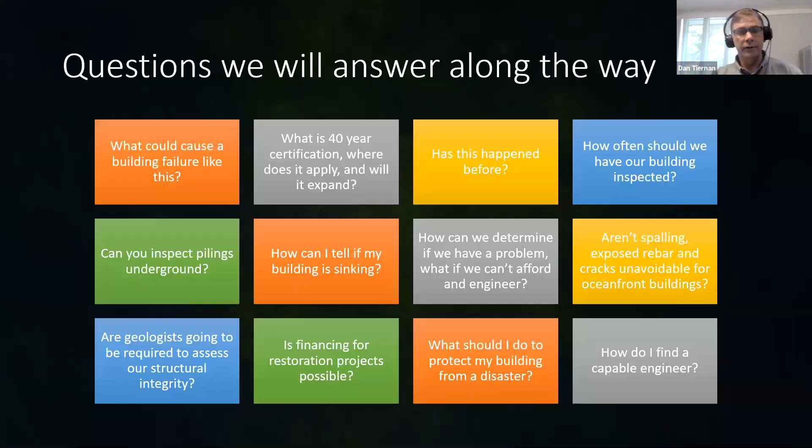We had several hundred people signed up for this course, and we had a lot of great questions that people asked, and we're going to answer, and these are just a sampling of some of the questions that we're going to try to address as we go through this. So just be patient. You saw what the agenda is. We'll get to all these different topics, and we'll try to address all of these questions and a lot more as we move through it. But I also want to make a quick disclaimer that there'll be certain things that we won't be able to answer. So our goal today is general education.

Like I mentioned, we have people from over 500 condos that registered for this course. So we can't address questions that are specific to your building or your area, although we will talk about certain areas based on the content of what we're reviewing. So this will also be very fact-based. We won't be predicting if or when something may or may not happen in the future. I'd love to be able to be good at that, but we're not even going to try.

And there are a lot of theories floating around about a lot of topics related to building safety. So we're not going to try to debunk any mysteries here. We're going to focus on just the facts, because I think there is so much that you can learn just in general about construction that maybe you didn't care about before, but maybe you want to learn a little bit more about now.

And although we have an attorney on the call today, Allie, thank you, Allie, we're not focusing on the legal implications or legal responsibility of what may or may not happen in an accident. So I know there were some questions about that, but we've got so much to cover already. We're going to try to avoid that. There's a lot of other webinars about that. So with that,

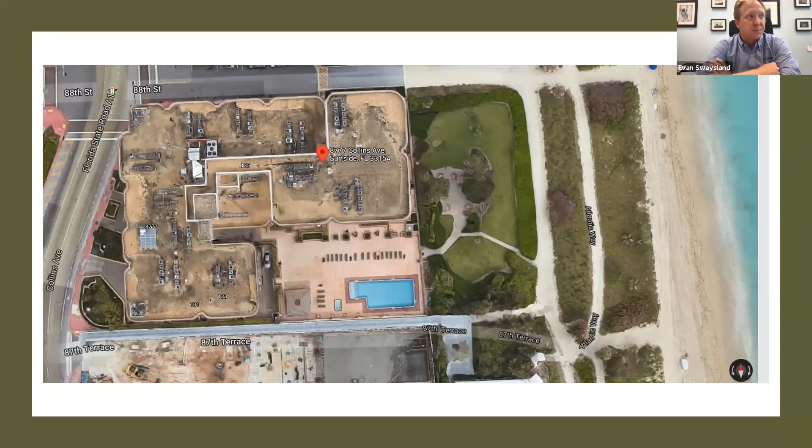Okay. Just one other picture I wanted to show here, from a top-down view. The most obvious thing I see right away is the proximity to the ocean, but anything else there, Evan, that is relevant? No, I mean, this is the north end of Miami Beach, and in that area of Florida, there's basically condominiums all up and down on that barrier island. So this is typical for what happened. Right. Okay.

Many of you may have seen this short video before, and some of you maybe have not seen it. It's very disturbing. And I just wanted to warn you that I was going to show this video clip from the surveillance camera from a neighboring property. And I'm doing this just so that I can have Evan comment on what he's seeing happening. And again, we're not going to make any conjectures or theories from this, but just observing what's happening and what he's seeing from a structural engineering standpoint. So I'm going to go ahead and start it now. Second.

So, it's hard to watch, and from the first-hand accounts, a portion of the garage collapsed approximately 10 minutes or so before, call it the north center section of the building. And in the aerial images you can see now, the portion of the pool deck, the pool deck slab collapsed into the garage. The portion that you can see on the ground more or less aligns with that center core that collapsed first. So now what caused the collapse, I don't know.

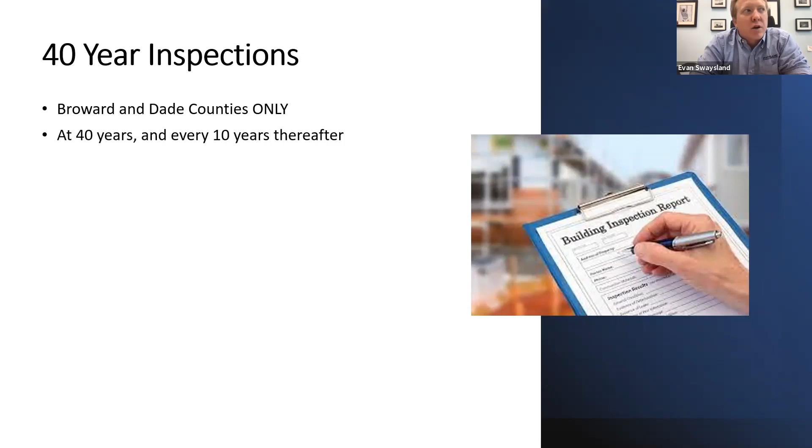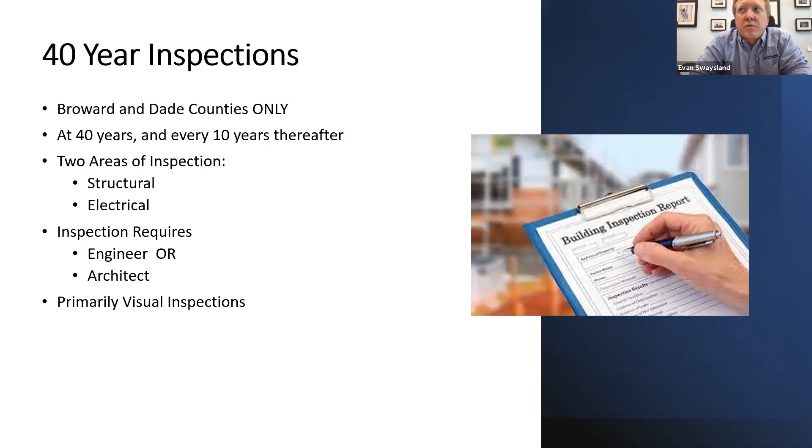So the 40-year inspection is a requirement in Dade and Broward County. When your building hits 40 years old, you're supposed to hire an engineer or architect to review the structural and electrical systems. And then every 10 years after that, you need to do another recertification. And I think this likely will become a thing in Palm Beach and maybe elsewhere. Realistically, what you're supposed to be looking for is life safety issues. That's really the basics of the 40 years.

And it started due to a balcony collapsing due to corroded rebar right at its cantilever moment. And that's kind of what stemmed this: hey, let's make sure these buildings are safe for continued occupancy. And its real intent was a cursory, visual inspection of the building. You're not diving into cores of slabs and X-ray and GPR to determine all these different conditions. It's a visual inspection and correcting life safety issues.

And incidentally enough, we had a pretty productive conversation with the City of Fort Lauderdale assistant building official, because we do those inspections and we've been doing a lot of work in Fort Lauderdale for a very long time, talking about the 40-year, talking about balcony restoration projects, and there's definitely going to be some changes to that certification program moving forward.

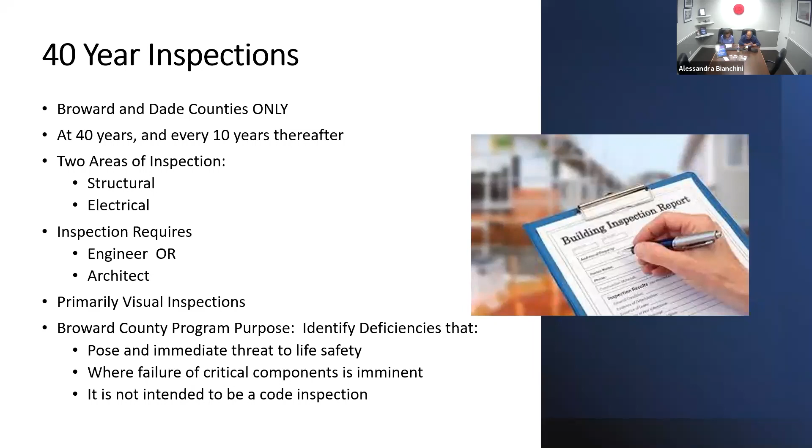Basically, Evan, I have the question: when you do a 40-year inspection, it'll involve railings, code, fire alarm, electrical, and concrete, visual concrete above ground. They don't get into anything underground or geotechnical, correct?

Correct. There's a standard form, and basically what you're looking at is the reinforced concrete structure, any structural steel elements. You're looking at walls, you're looking for settling or bulging of walls, which would indicate maybe you have a problem with the footing.

But no, there's never been inspections of deep foundations, and that's going to be something that is likely going to be new. And there's not a lot of companies that can do that non-destructive type of testing to make sure that your footings are working how they're supposed to work. So again, this is all new territory as of last Thursday.

I have some questions from some audience members. I think we can piggyback onto each other while we're on this 40-year inspection topic. Some people are interested in what is the normal useful life of a building and how often should you get inspections, and also can a visual inspection give a high degree of confidence to the safety? Can you kind of answer some of those? What's the normal useful life?

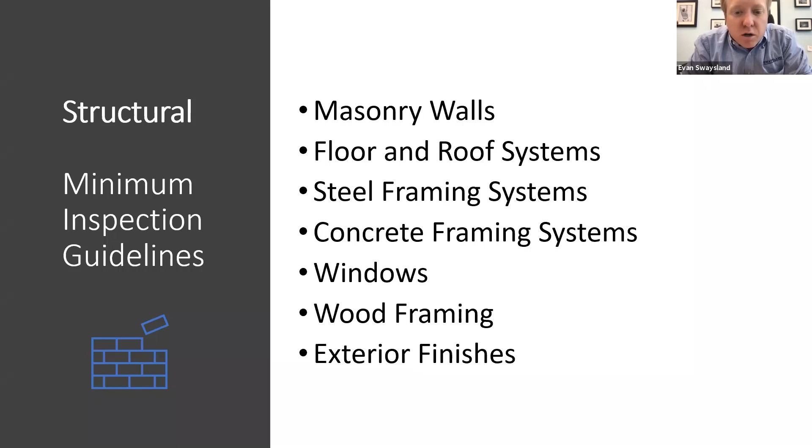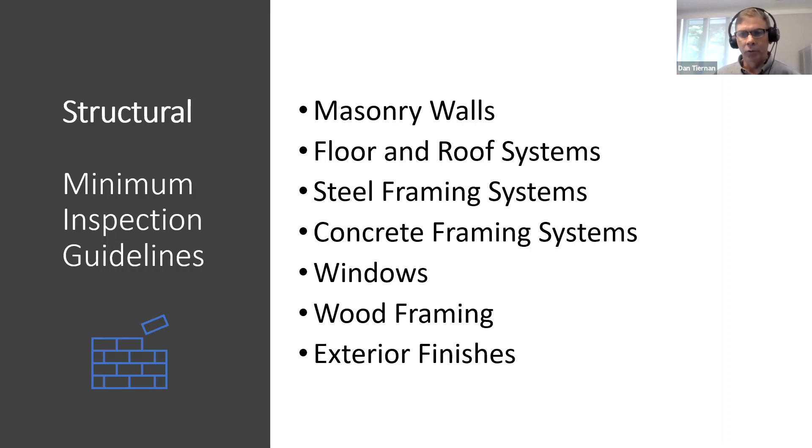And I think that's a great point. One of the key things we try to remind all of our clients that are high rises, really all the associations, is just the absolute importance of preventive maintenance. So often it's so easy to ignore when you have a new condo. It's been turned over from the developer, everything is working great, and it's hard sometimes to get people to focus on the importance of developing these maintenance contracts to make sure that everything stays in great shape and that we don't just let it go and count on warranties. Hopefully this will remind people of that.

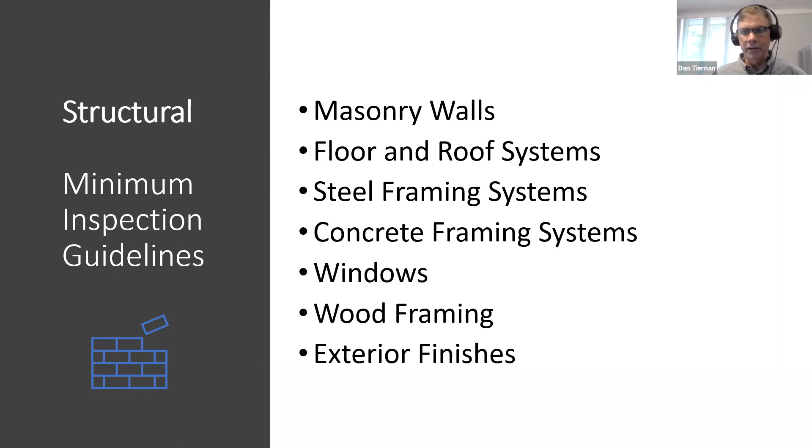All right. So then I put up a quick slide here, and you mentioned some of this from a 40-year inspection. These are kind of the minimum inspection guidelines. It gives you a sense of the kind of things they're looking at, and Evan already hit on these. And then from an electrical standpoint, there's also a fair number of things you're looking at here, but like he mentioned, it's not necessarily a code enforcement thing. This is more of a life safety situation, and they're looking at these from that standpoint.

So there's not elevator inspections related to this. There's not piping and paving and other things like that.

It's very much around the structural and electrical from a life safety perspective. So the next thing that we were going to talk about is honestly the rarity of anything even similar to this. There's been nothing that's ever happened like this that I'm aware of, or anyone I've talked to has been aware of, in Florida or even anywhere in the country.

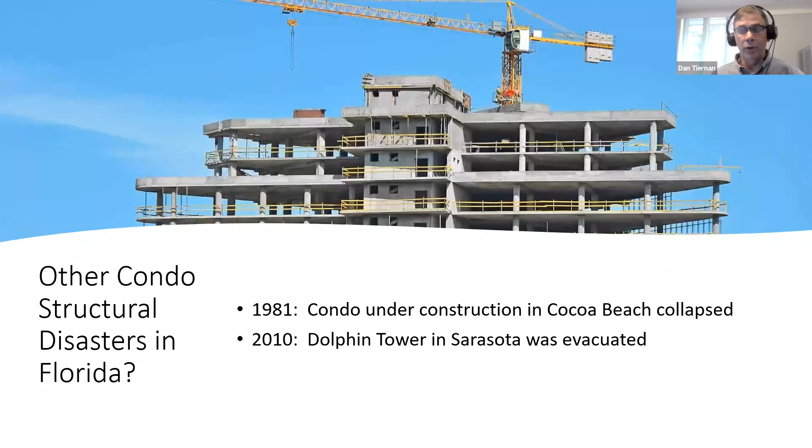And so we just did a little research on other condo structural disasters, and a couple that we're going to talk about here are this condo in Cocoa Beach that collapsed under construction in 1981, which is 40 years ago. And then this one building in Sarasota called Dolphin Tower that was evacuated almost 11 years ago to this day. So let's talk a little bit about each of those.

Evan, why don't you tell us what you know about Harbor Cay Condo in Cocoa? Yeah. This was the year I graduated high school, by the way. Yeah, and I wasn't even born yet.

But I actually have some cursory knowledge. We're not a large office. We're an office of 4 professional engineers, and 2 of them worked for a company that did some expert work at the time for this building. So basically, the reason for that collapse was a combination of design flaw by the engineers, and also construction flaw by the contractor.

There was a particular problem with where the rebar was set, the effective depth of the rebar in the slab, and there wasn't enough accounting for punching shear in the slab. So what ended up happening is you had basically a punching shear failure, which caused that pancaking effect. And there's also some discussion of compressive strength of the concrete not being per design, which all relates back to multiple errors resulting in this disaster.

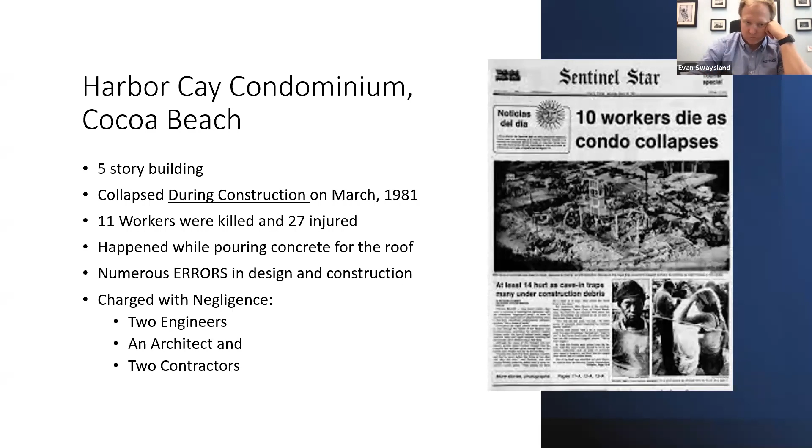Yeah. Thank you for that. And I think one interesting thing did come out of that. Tell us about what this threshold building inspection is. Yeah, so when you're performing work on certain size buildings, so it's a 3-story or higher building, and I think a building over 50 feet too, the building departments or Florida Building Code requires the owner to hire what's called a special/threshold inspector.

And that's a specific license for basically inspecting ongoing construction work, because the building departments won't perform the inspections. They just review your inspection reports. And the Florida Board of Professional Engineers just came out with another special inspector license called a special threshold limited license, which allows engineers to perform inspections on concrete restoration projects with minimal repair.

So those are the 2 licenses now that you basically need as a building. You guys that are likely on this webinar are all going to meet this requirement. So you need to make sure that whoever's inspecting your building has this license and is using the correct authorized representatives that the Florida Building Code allows you to use. Great, thank you for that.

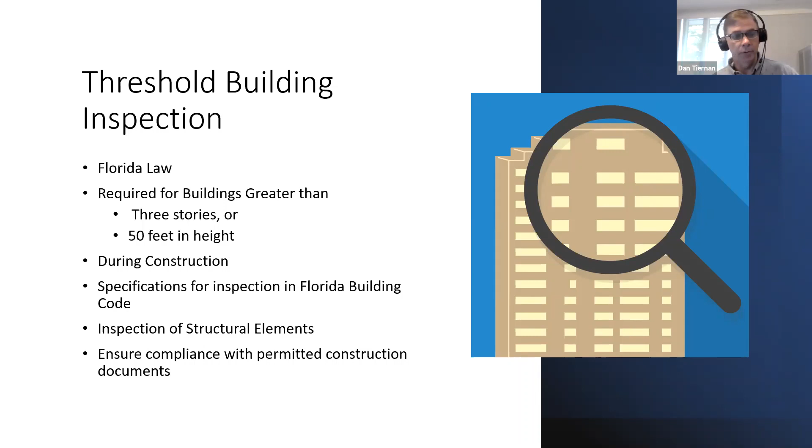So again, a collapse like this has never happened before in the history of Florida that we're aware of. Again, this was under construction, where it emerged very quickly while it was being constructed. It was still a horrible tragedy. A lot of people died, horrible situation. But again, we're not aware of anything even remotely similar to what we've seen happen here recently.

What about this Dolphin Tower in Sarasota? What do we know about that? What we know is that some residents on the 4th floor basically started noticing a very large crack opening up in their floor slab. And they actually had an engineer that had been doing work out there, Karins Engineering, who's still out of Sarasota. So, Evan, just to be clear, the 4th floor was actually the first residential floor, right? Right, 3 stories of garage. Yeah. Okay. And they started noticing a crack.

He ran over there, and within a few days, they basically shored up the entire structure and likely saved it. And I didn't see a significant amount of anything as to the cause, the why. But they did spend over $8 million in repairs over many years to repair the structure, and it is now inhabited again. But there was no injury or death there because they acted quickly when they saw a crack forming that was fairly wide, we're talking inches wide, not just a hairline crack.

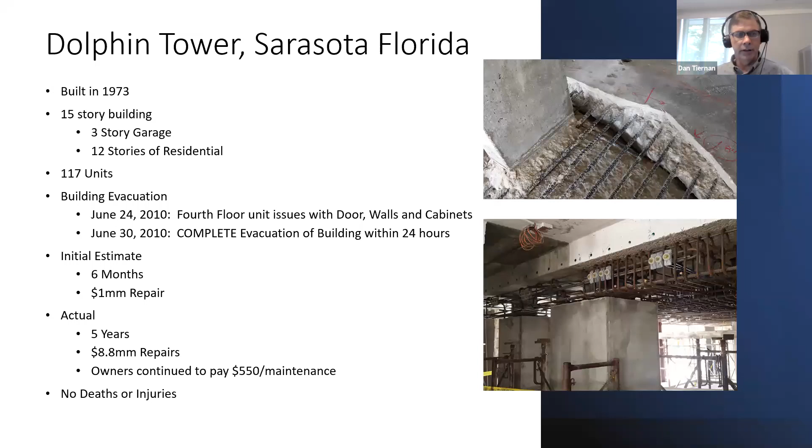Right. So again, there were some really obvious signs of something wrong that just couldn't be ignored. So I think the point of this was just to show that we're in absolutely uncharted territory here. This is nothing we really have a lot of case studies to look at. We can learn a little bit and understand a few things from some of these past problems. But again, it's an incredibly unprecedented event, and I think it's going to take a long time to really understand.

The next thing we want to go into is the buildings down here. The structures are primarily concrete and rebar. One of the key challenges we have in all of our condos is the deterioration of this concrete and the restoration. So we want to make sure people understand why this happens, how it happens, and what you have to do to deal with it. So do you want to explain this process of concrete corrosion?

Yeah, so your concrete slabs and columns have what's called reinforcing bar located inside them, and that's typical construction. I'll get into post-tension a little further, but when the concrete encases that reinforcing bar, it has a high pH level, and over time that pH level starts to drop due to chloride ingress into the slab. Once the pH reaches a certain point, your chloride content is high enough that the embedded reinforcing bar will start to corrode. So it's rust forming on the reinforcing bar.

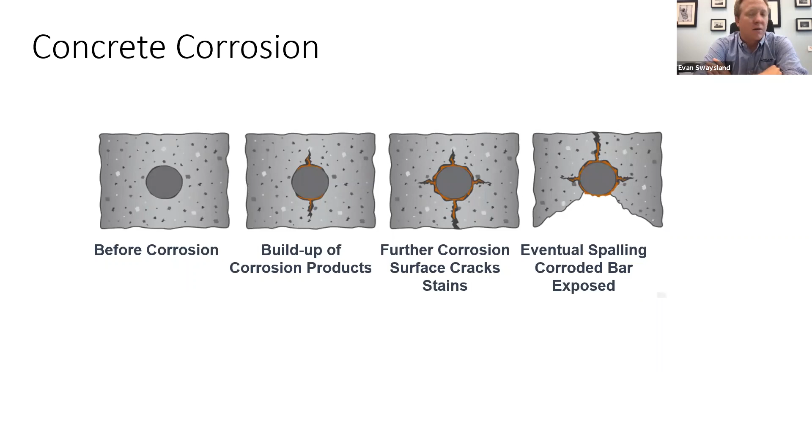Okay, great. And then what should people be looking for if they're concerned about their concrete deterioration? Yeah, so from a unit owner perspective, it's cracking in your edges, your overheads, cracks in your tile. You'll sometimes see rust staining, particularly around railing post pockets. Any type of spalling is of concern. If you have water intrusion coming through a slab or into your building, this could all be something that you guys need to pay attention to.

Yeah, so you ran by a term real quickly there, railing post pocket, right? So just explain what that is. Yeah, that might be something people... Your aluminum handrail, typically the slab will have a core, so an open hole for the aluminum railing to sit in, and that gets filled with the non-shrink, non-metallic grout.

What can sometimes happen is that the aluminum post is too close to a rebar and you get a dissimilar metal interaction there, and you can actually accelerate some of the corrosion of the steel in your railing post. So usually what you'll see is rust bleeding coming out right around the post of the railing. So that's an important thing to pay attention to.

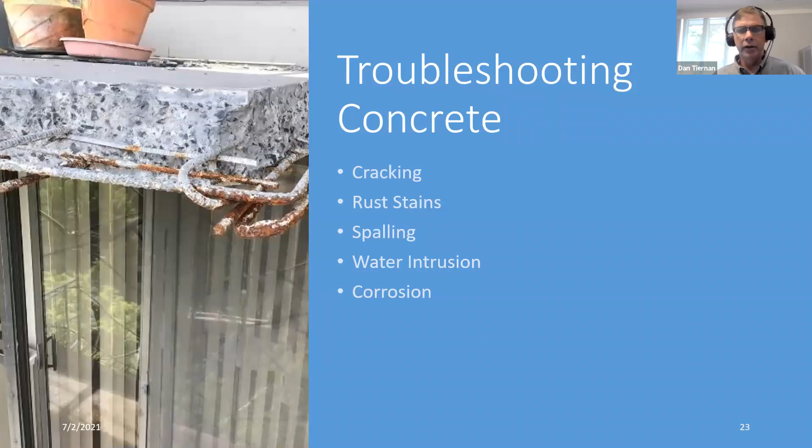Yeah. So all of this really is about managing risks, things that could go wrong. So Evan, you want to just describe these three things here? Yeah. So this would be our typical failures of structures: a spall on a slab edge breaks loose and falls to the ground and hopefully never hits anybody. That would be the typical worst case scenario. And occasionally you might have a significant amount of corroded bar at the cantilever moment.

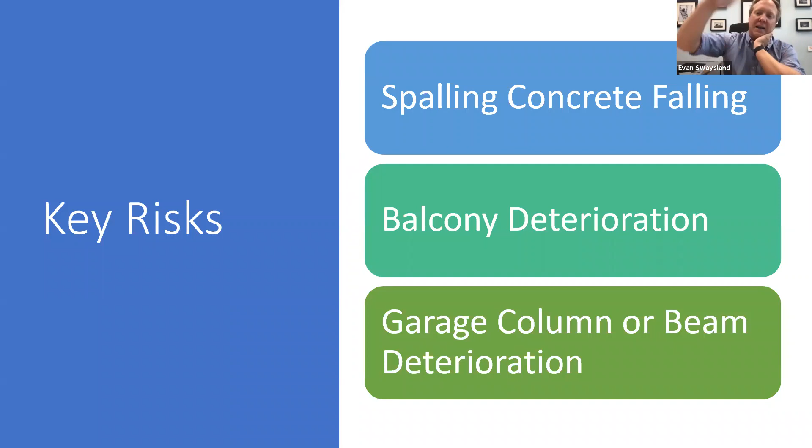You might have excess deflection or maybe some separation of a slab, but you never had the pancaking. And one thing that is very serious, particularly if your garage is under your building, is paying attention to your building columns, your building beams, and your garage columns to make sure that those don't have any deterioration, and if they do, to repair them properly, to make sure that you're maintaining load path for garages, columns, and beams. There needs to be thought about how you're making the repairs.

It's not just chipping out and putting stuff back, when that process might cause a more significant problem elsewhere. If you remove the load from the column and put it elsewhere, you could have something bad happen in a different portion of the building. So it's a lot to consider, and it's not for a lay person to consider. It's for you guys to hire an engineer to come out and do an analysis and make recommendations, and then follow through with the recommendations.

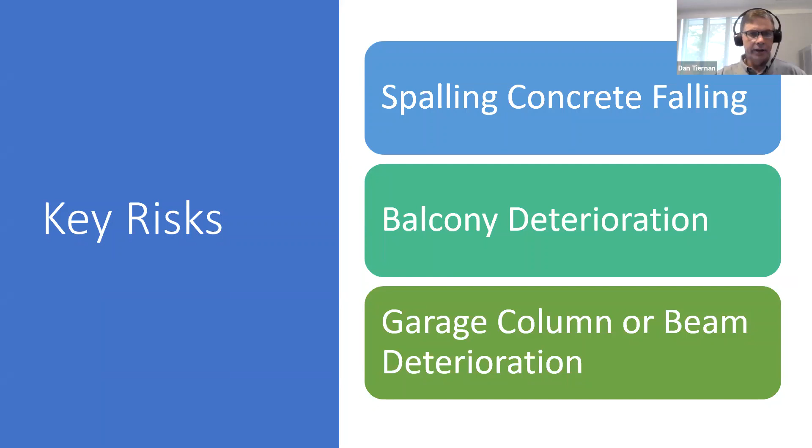And this next slide here really made a lot of sense to me. It sounds like all these situations are a little bit different. There's not one way to repair this, and it all depends on what the situation is. Correct. And that's part of hiring somebody that's experienced in doing this.

And I will tell you, in our industry, which is exterior repair, and I think Carousel can corroborate, is that our industry was already stressed with the amount of work that we had. And it's even more stressed now with what's going to happen over the next six months to 2 years in terms of repairing buildings. So you need to make sure that you're dealing with somebody reputable.

The International Concrete Repair Institute is a great place to start. There's a lot of people very active in our local chapter, and we've all been in the industry for a very long time and know the good and the bad. And I think that's a good resource if anybody wants to get some information about why we're doing repairs a certain way, and maybe who to talk to and what are the materials, and to gain some knowledge in this.

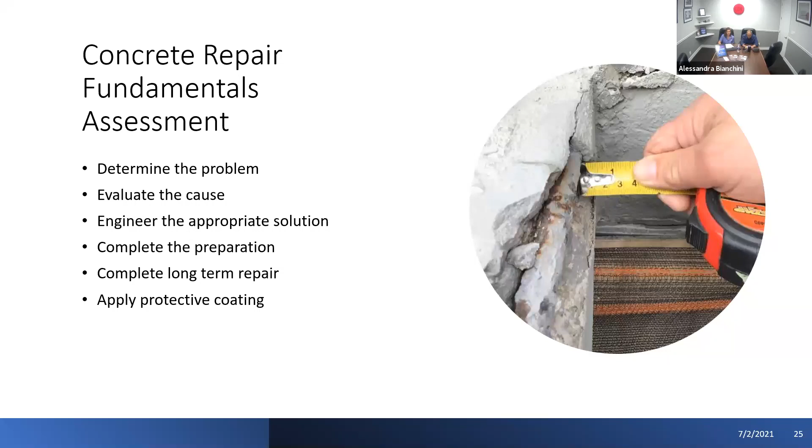And we talked about some of the potential red flags to look for. Evan, you want to just comment on some of these? Yeah. So, the main thing is identifying cracks and corrosion. And if you see it at your unit, report it to the manager so that they can have maintenance take a look, and then there can be a trail, so that way it gets followed through.

Leaks in garages. If your garage is underneath a recreation deck or pool deck, and you're getting leaks into the garage, that water is likely affecting the reinforcing in the slab. But a lot of that might not be serious, depends on how your building is constructed. So if you have a pre-stressed joist system in your garage and you have leaking coming through, your slab really doesn't have any reinforcing in it, so it's not as critical per se as if you have a flat plate slab. So there's different thoughts in this.

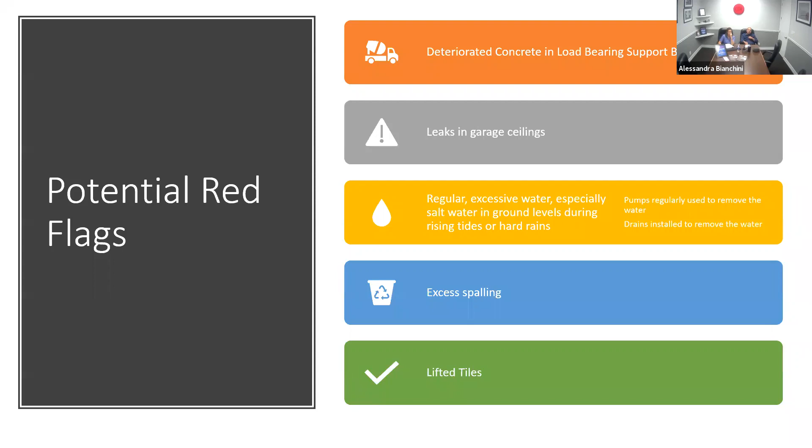Yeah, but putting in a gutter to remove the water may not be the best solution. No, we used to call them the Miami expansion joint system, putting a gutter underneath the joint and just directing it to the ground. That's stopping the leak after the water already got in. Right, you're not supposed to have water travel through concrete slabs. So it is imperative to have correct membranes on slabs. And the reality of this is that this does not come at a cheap price. Doing things the right way costs money.

And just going a little bit more through Dan's list. I think over the next 20 years, we're going to be facing another thing that we're going to have to start thinking about, which is sea level rise. I know at our house in the Keys, the water used to never go above the dock, and now it goes above the dock 3-4 times a month.

So I don't care what anybody's opinion is on global warming or not. I just know the water level is coming up, and you might see it now in your subterranean basements or garages, and you need to develop a plan to try to mitigate that through vapor barriers, waterproofing barriers in garages, effective pumping systems.

And then if we can't do any of that, then maybe we need to start thinking about putting protective cathodic protection jackets on columns and things down in garages that are experiencing this condition, similar to what you may be doing at large bridge supports that run through the ocean. So there is technology to address this, and it might be something that we need to start looking at further.

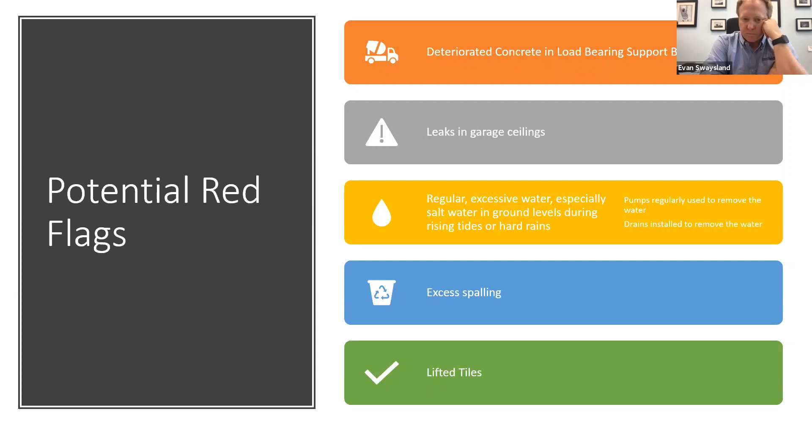The excessive spalling: if you have any spalling, it's already excessive, and you need to start getting an analysis done and coming up with a repair plan. And then lifted tiles, that is always the biggest thing when we enter into a balcony repair project, is that the $500 in tile installation you spent in 1992 is the most priceless possession you have in your entire life, and I can't remove it in order to properly fix the concrete.

And those times need to change, and we need to be able to repair absolutely everything at this time so that we can be assured that we're doing everything the right way. And lifted tiles, delaminated tiles, it's not going to be saved anymore or deferred. That's going to start coming off. Right. Thank you for that.

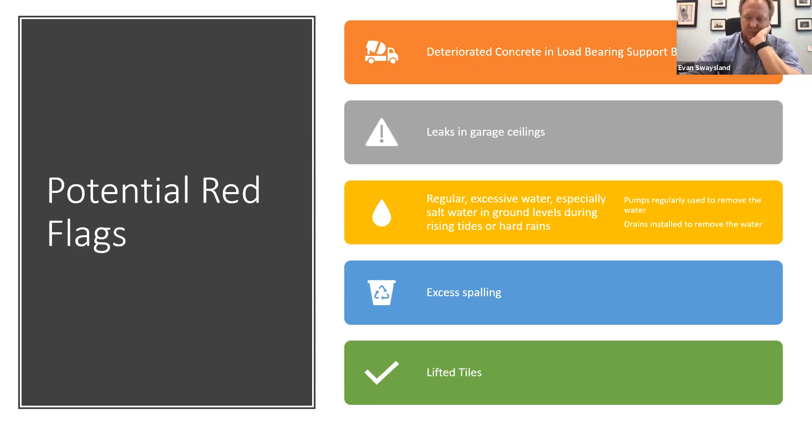Hire a professional engineer that's familiar with South Florida corrosion, structural, and I see a lot of questions from people asking, if I see a rust spot, what do I do? Or if the building's leaking, what do we do? And I think the takeaway from having a successful project is to start off with a good engineer. So if you're unsure, like Evan was saying, if you see spalls or any of these issues, your first person to contact would be a structural engineer.